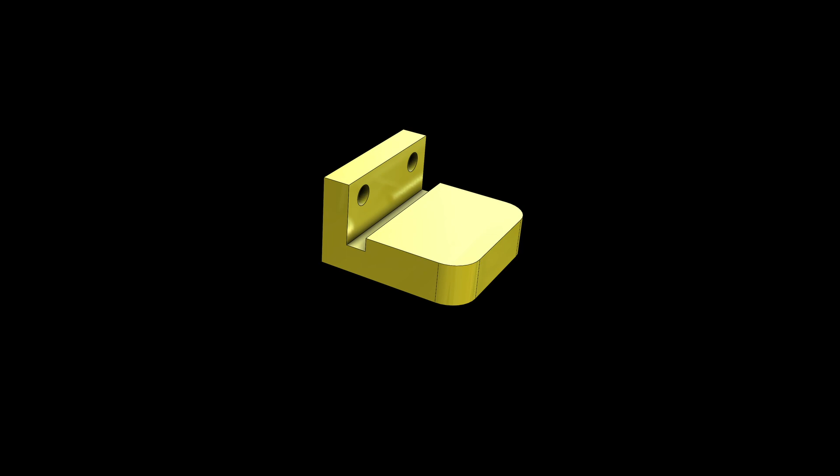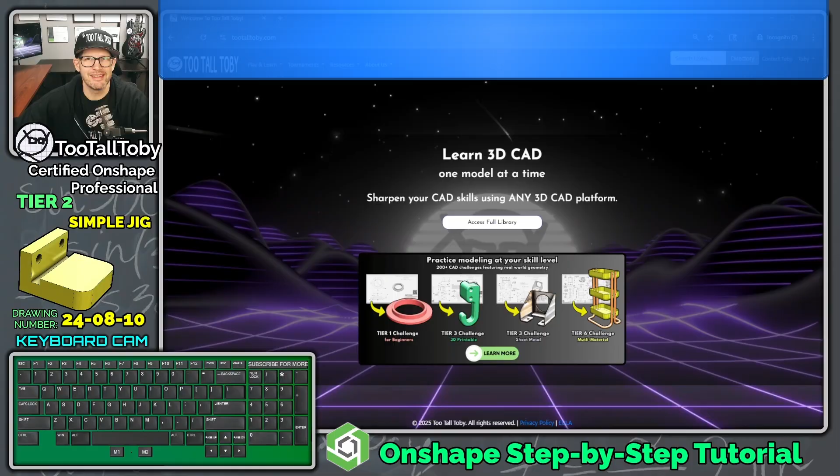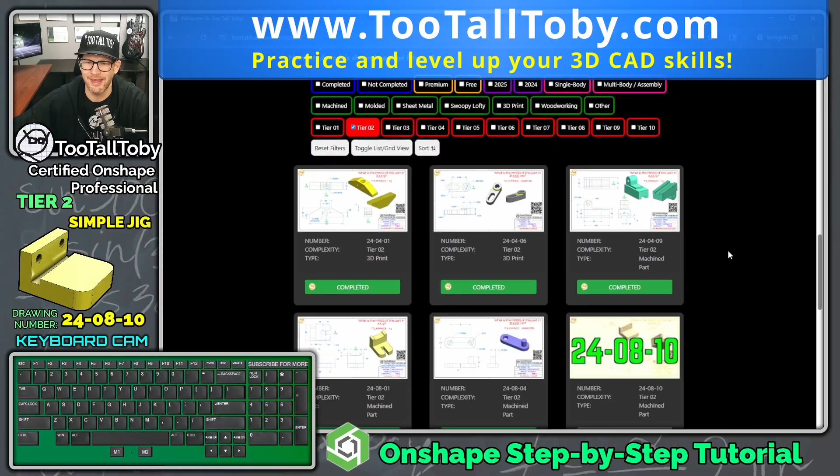TooTallToby here, and today we are going to continue trying to create tutorials for all of the Tier 2 challenges found in the TooTallToby library at TooTallToby.com. This is where you can practice 3D CAD by modeling up real-world parts. And even though this is a simple Tier 2 part, this is actually one of my favorite parts in the library, just because it has a practical use. I love the models that have a practical use.

So here you can see we can filter the library by our difficulty level or by the type of model that we're trying to create. We're going to filter for Tier 2 challenges. And we see here the next challenge is this 240810. And this part is called Simple JIG. And that is, in fact, what this part is.

So we can see that 194 people have successfully solved this thing. And it's got an average solve time of 4 minutes and 25 seconds. So we're going to try and beat that average solve time today. Let's click here to begin and go.

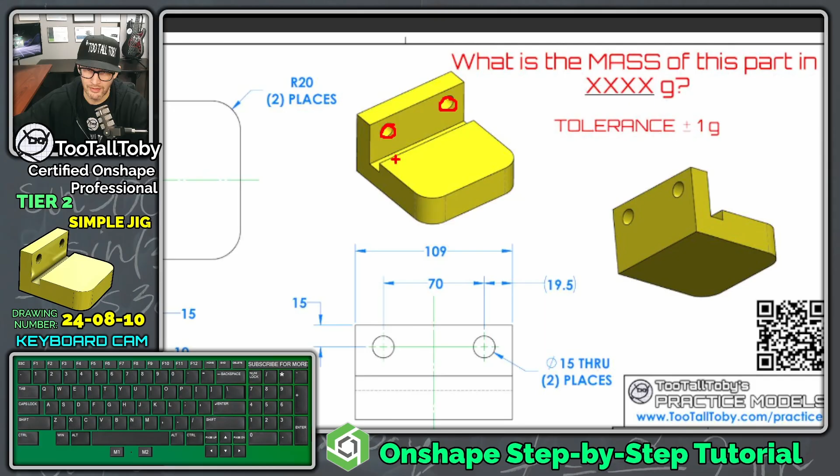And so we can see here that this is something that I actually 3D printed out so that I could align some holes here. So I think we were building a deck, like a little platform, and we wanted to hook this thing on the side and then have the location for those holes all be the same throughout the platform. So really simple 3D printable jig, really nice application of 3D CAD here, even with a simple model.

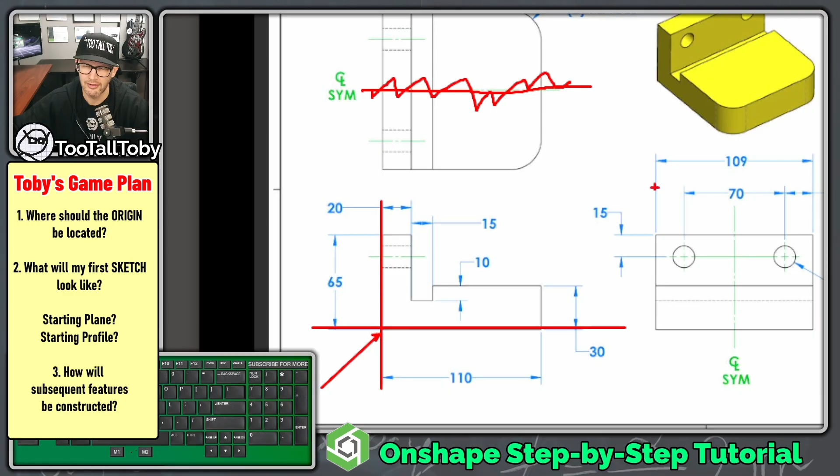Now, as always, before I actually get started in the 3D CAD, what I like to do is come up with a game plan. And the first thing I ask myself is, where should the origin be located? This model has symmetry, so the origin is going to be somewhere along this plane of symmetry, and it's going to be down here in this kind of lower left corner. It's right at the intersection of where a lot of dimensions are coming together, and that usually makes for a good candidate for the origin.

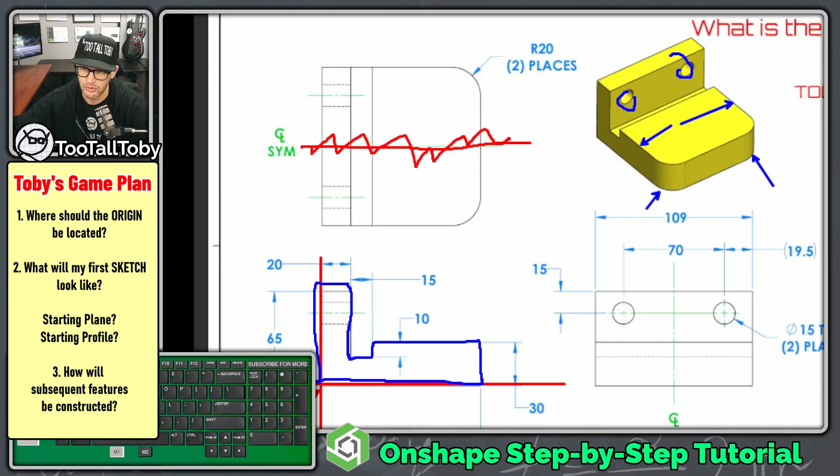So I think my first sketch is going to look something like this. We'll come up, over, down, over, up, over, down, and close it off. And then we will take that sketch and we will extrude it out here to the depth of 109 millimeters using the symmetry option. Once we've got that shape in place, basically all that's left is just to add these holes and then add these fillets, and we should be good to go to calculate the mass. So what is the mass of this part in grams? We're going to try to figure that out and enter that answer in right down here.

Now, I know we took a minute and 15 seconds there to come up with a game plan, but I think it's always important to come up with this basic game plan. Where should the origin be? What's my first sketch going to look like? How are my subsequent features going to land in the tree?

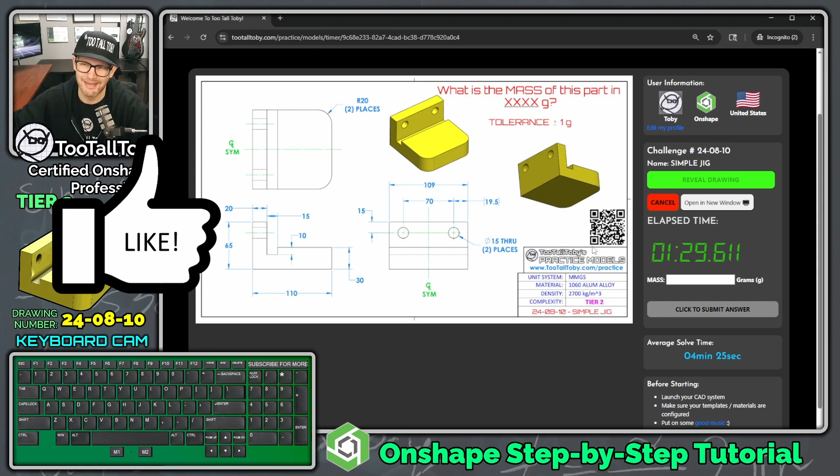I'm going to click this button here that says open in a new window. That lets me take this drawing and move it over here to this second monitor. And I'll take this over here so that we can keep an eye on our time and see if we can beat that average time. We're going to say create document, and this is going to be called 24-08-10 Simple JIG, and we are going to place this in the public space.

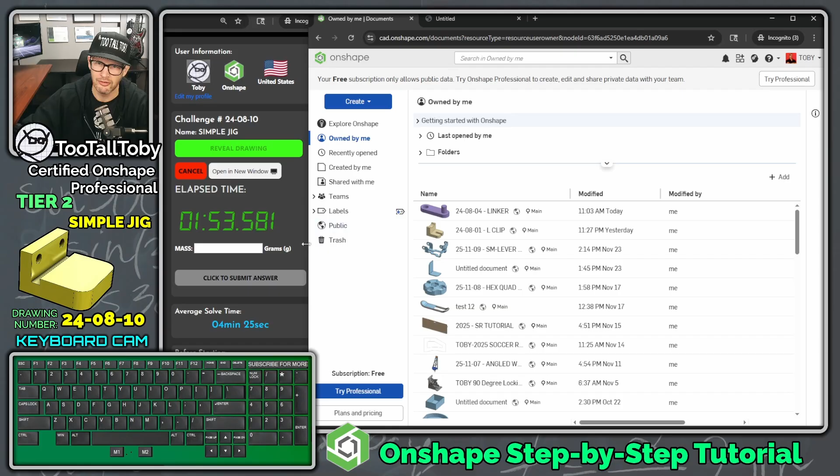So if you're using a free version of Onshape or a paid version of Onshape, you can search the public space for that document name, and you can actually open up this document and look through the entire history tree. All right, here we go. Options, workspace units, and we're going to say millimeters. Yep, millimeters and grams. That all looks good. Front plane, S key, begin a sketch, N key to get normal to, S key, begin a line. I'm going to single click here.

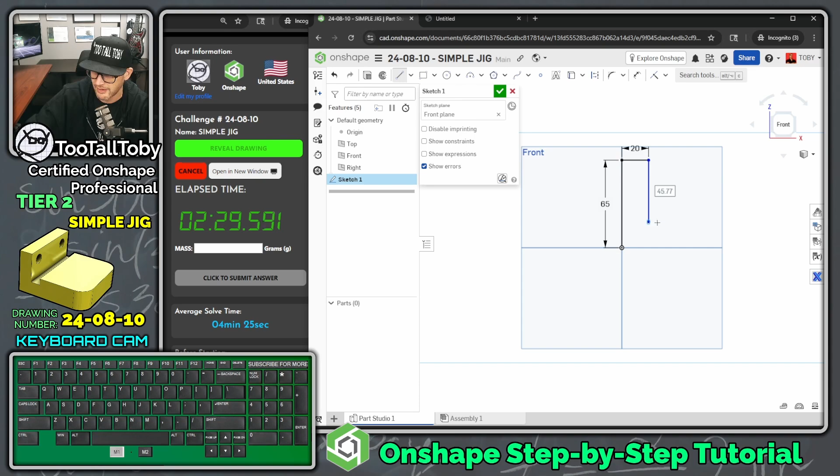I'm going to create a line that comes straight up. That's going to come up to a height of 65, enter, over in this direction to a distance of 20, enter, down in this direction, not sure how far down, up and over this way, and down here till I'm horizontal with the origin. And then we'll close that off. And then for that last dimension there, we can type in 110.

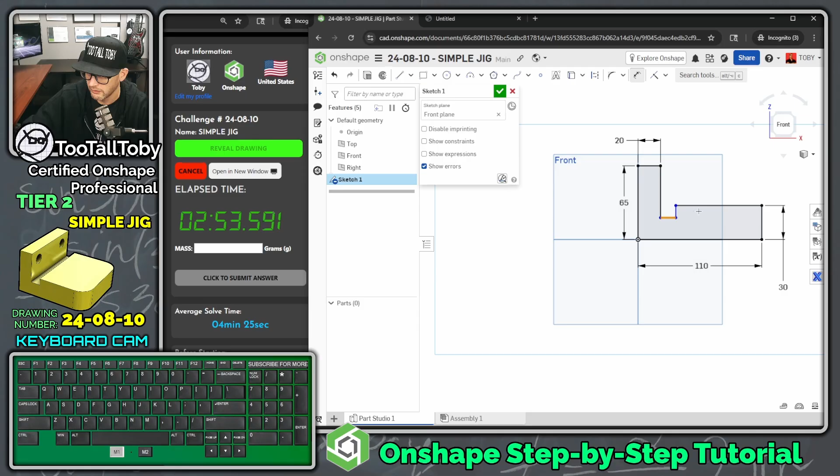Now for these remaining dimensions, what we'll do is we'll press the S key on our keyboard. So hit escape, S key, dimension, and then we'll just add in these final dimensions here. So 30 and 10 and 15. And there is your first sketch. If you want to pause the video and make sure you get that first sketch in place, nice and fully defined, fully constrained, that's what it should look like.

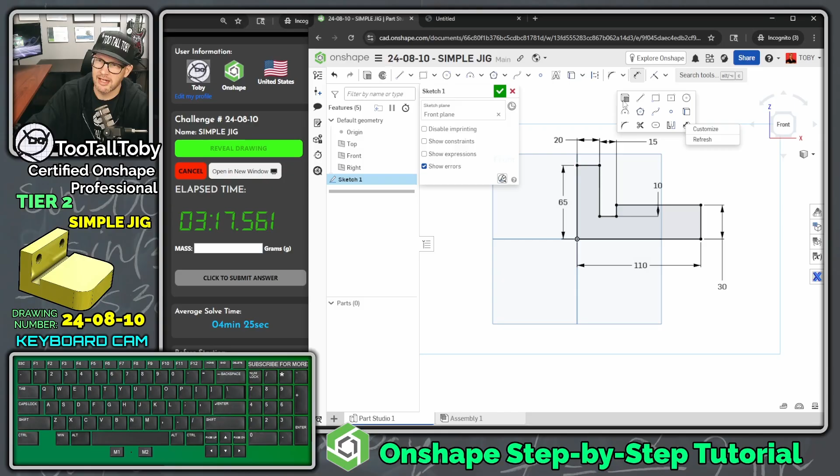And then what I do is I press the S key and I right click and I say customize, and I add some icons to my S key menu like extrude. That way I don't have to always go up here to the corner. I can just jump right into extrude right from sketch mode.

Now for the extrude command, the main shortcut I use is the tab key. I press tab, tab, tab. That takes me into the depth field, 109, enter, and then I press tab, tab, tab, and I press the space bar. So tab, tab, tab, enter the depth, and then tab, tab, tab, press the space bar. That gives you symmetric. Then you can just press enter, and boom, you are done with that command.

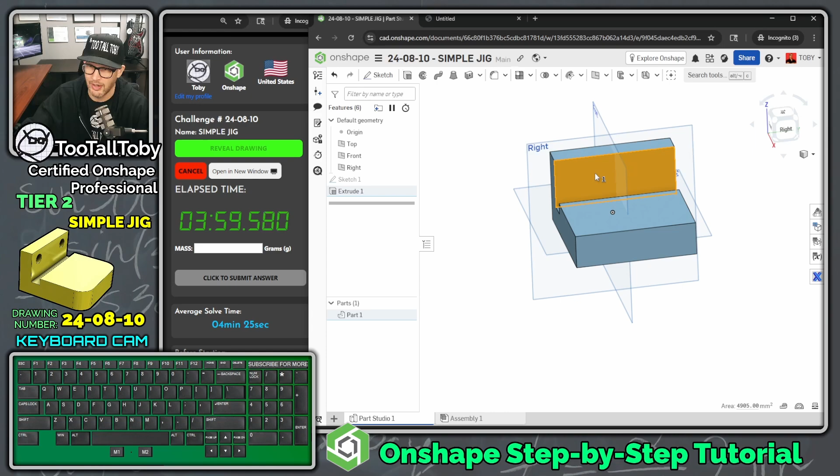Now, for the location of these holes here, what I'm going to do is I'm going to drop in these locations with some sketch geometry, and then I'll reference that sketch geometry in the hole tool, or I could actually just draw this in as a circle. I could do it either way. I'm going to use the first method just because I think it's good to know how to do that. So I'm going to pick this face here, S key, begin a sketch, N key to get normal to.

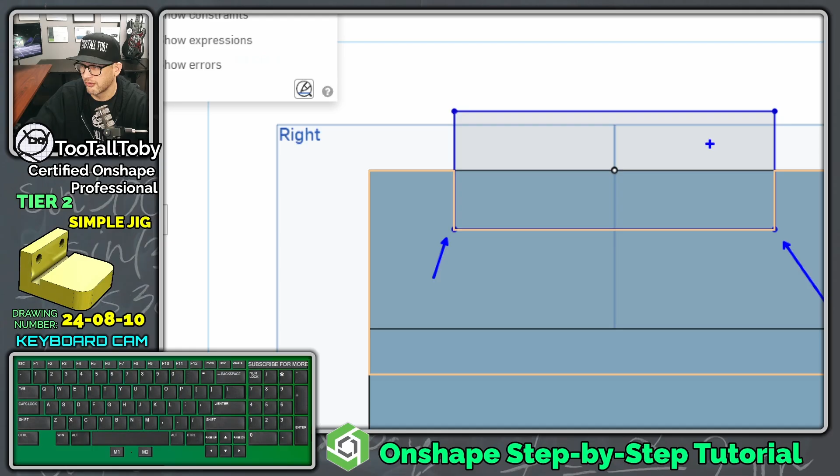And then a little trick that you can use here is you could use the center point rectangle, so S key, and then I could use the center point rectangle here, and I could just wake up the midpoint of this top edge and draw in a rectangle. Now, the reason I'm doing that is because I'm really interested in this point here and this point here, and now those 2 points are symmetric. So I've got center line symmetry on this drawing. So that makes it really easy to get the location of those points.

S key, dimension. I'm going to go dimension here from this top edge down to this point. That's going to be at a dimension of 15. And then the dimension for this line here is going to be a dimension of 70. And that should give me the location for that point and that point, which are going to become the location of my holes. So just kind of a cool little trick you could do there in Onshape.

Sometimes I'll go into that sketch and I'll rename it. So Shift N, and I'll call this one sketch location of holes, just to make it a little easier when I look at this tree later on. I kind of know what each of these features is. Maybe this feature here, Shift N, I'll call this like main L shape with notch. So whenever I look at that feature in the tree, I know right away what that feature is doing.

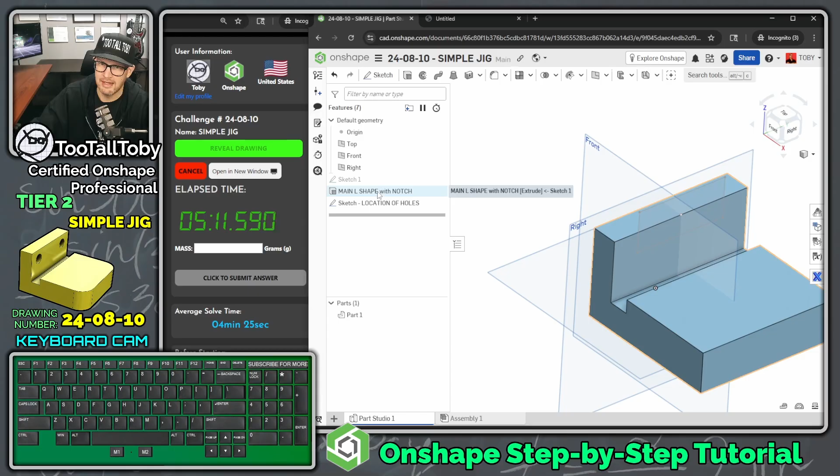So now I've got this sketch here. And by the way, sometimes those sketches are a little bit difficult to see. You can right click on that sketch and you can go here to sketch appearance, edit sketch appearance, and make it like a red, something that'll really pop out there. So now you see it's very easy to see that sketch, a lot easier to pick those points.

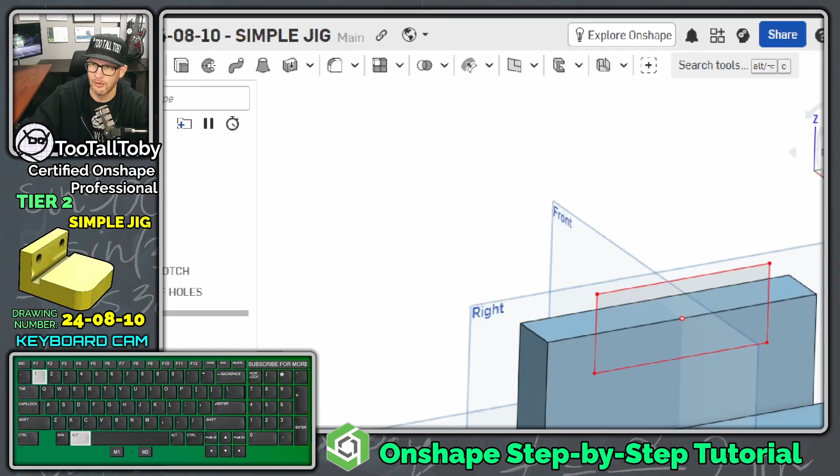So now I can go here to the hole tool. Now, if you can't find the command, you could always use the search here. I've got my window a little bit compressed here, so it's kind of hard to see.

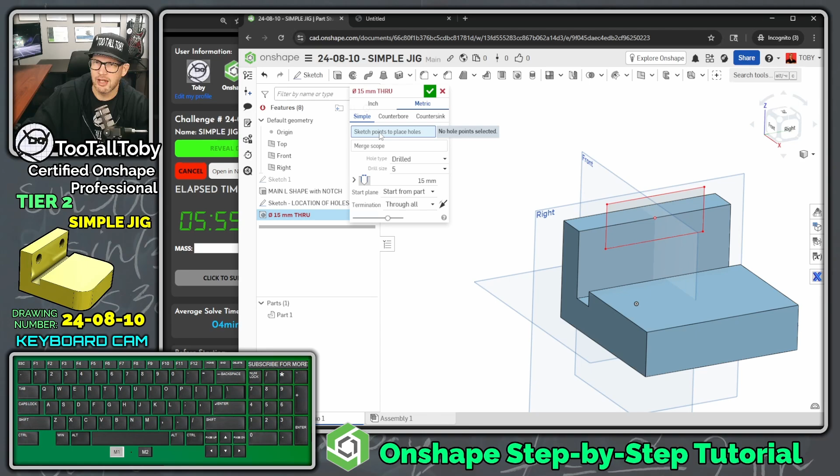But if I just make it a little wider, you can see the hole tool here. So hole, and then for this hole tool here, I'm going to say that I want to use a diameter of 15 millimeters. One thing I really like about the hole tool is as soon as I enter that value, the name of the feature here updates. So I type in 15, press enter, and now look, the feature updated to 15. And then here where it says sketch points to place holes, well, I could just pick this point here and this point here, and boom, we are done.

So that's going to be a metric hole, simple hole, diameter 15, and then you pick these two locations here, this point and this point. And we hit the green check mark, and boom, there is that hole. We're done with that feature. Don't even have to rename that one.

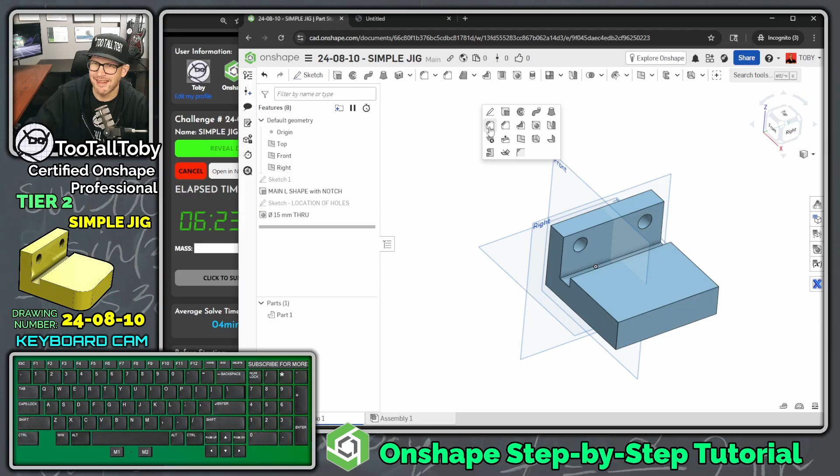And then S key fillet, and we'll just pick this front edge here, this front edge here, and we'll say that that fillet has a radius of 20 millimeters. And that should pretty much do it for that one. Maybe I'll rename this, Shift N. I'll call this fillet front corners. Even though it's a simple part, just a few features in the tree, it's still a really good habit to rename your features.

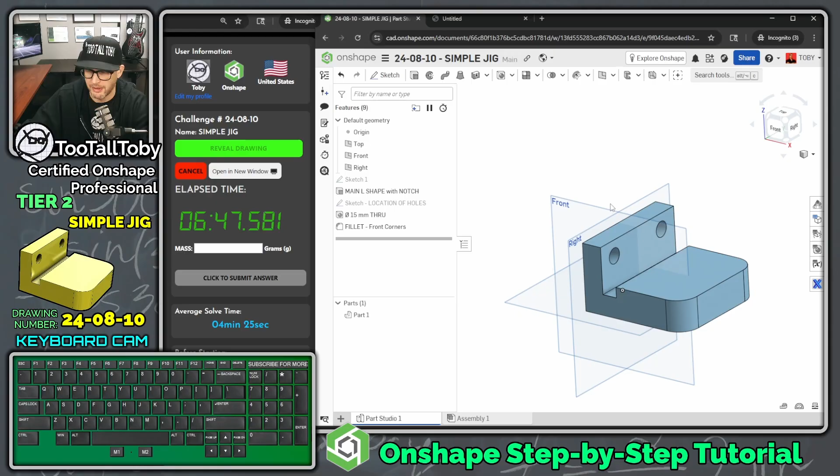Here, if we didn't want to see the planes anymore, we could press the letter P. That hides our reference planes. A lot of times what I like to do is change the color of the part to match the customer color. So I'll go here to the name of the part in the parts list, right click, and I'll say edit appearance and make this like a yellow here to kind of match the customer. Customers always like it when you do that.

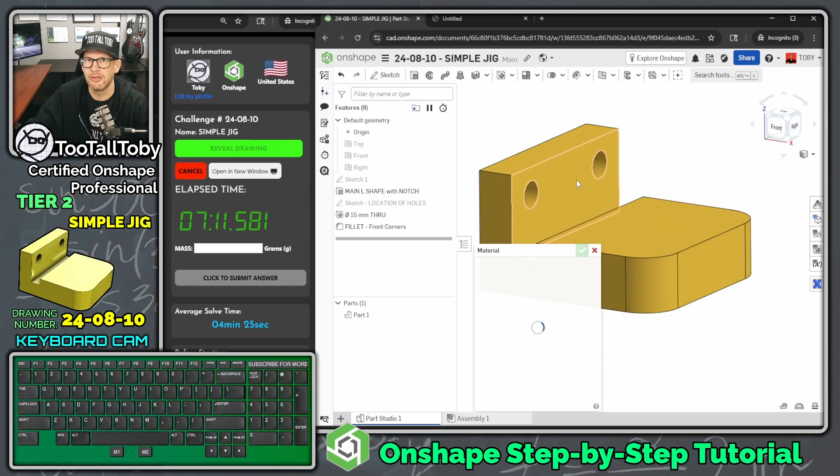And then finally, I'll right click on the name of that part again and say assign material. Now this is going to come from the TooTallToby custom library of materials. So if you are not familiar with how to set that up, just take a look down in the description. We'll include a link in the description. Looks like we're going to be using 1060 aluminum again. A lot of 1060 aluminum parts here in the tier 2 category of challenges. So 1060 aluminum from the TooTallToby custom materials.

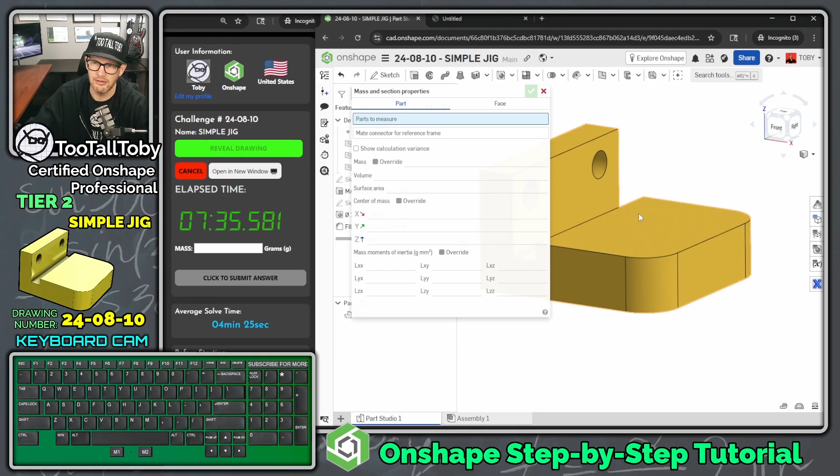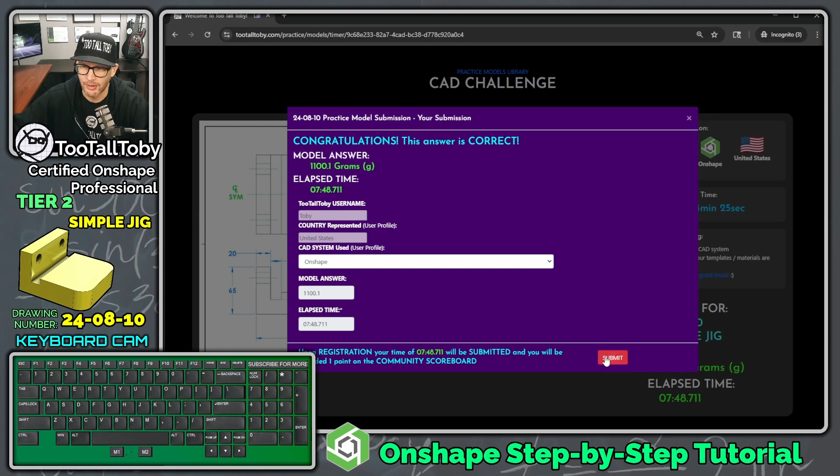So we're going to say submit here, and it looks like we were a little bit higher than the average, 4 minutes and 25 seconds. Ooh, we increased the average to 4 minutes and 26 seconds. So we did take a little bit longer than the average, but that's okay. We could always go back and use try again. Now that we know how to model this thing, we could actually try to see if we can improve our time and come up with a faster time if we do that try again function.

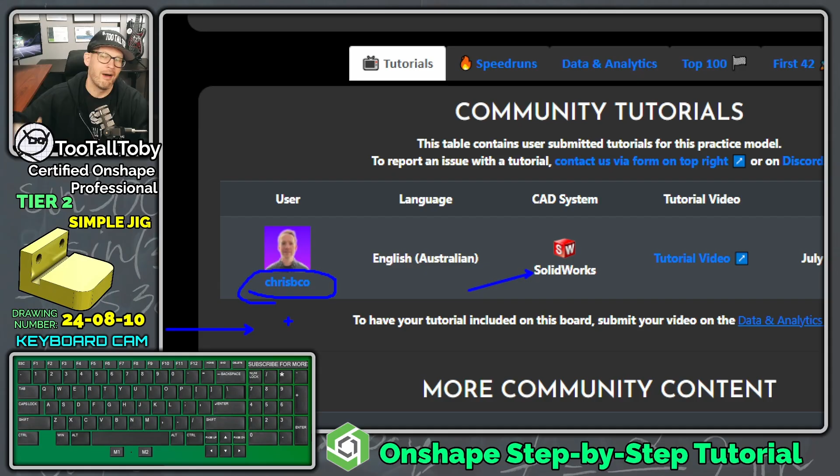So now what I'm going to do is go in here to data and analytics, and I'm going to upload a video of this tutorial, and that way my video will show up here right underneath chrisbco. This guy makes some great tutorials for SolidWorks users, and now I'm going to be adding in another tutorial for Onshape users so everybody can learn from this platform.